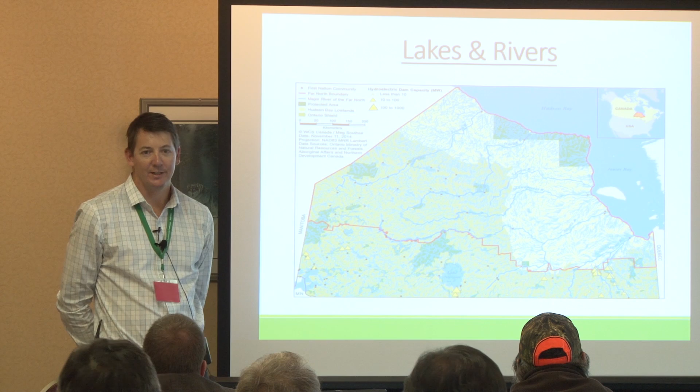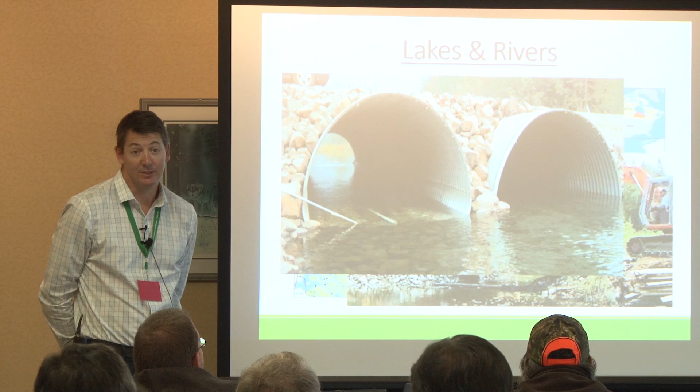In Northern Ontario, we do have the good fortune of having lots of water. So when stringing, whether it's a network of infrastructure or individual links to communities, there will be water crossings, and they can be done well when there's careful planning in place, respect for the environmental values, and the right mitigation measures or avoidance where possible.

There's a number of examples for crossing water, whether it's a steel modular bridge or culverts. But I think in any of them, when in the planning phase, priority should be on looking at avoiding them and identifying them early on, so that proper mitigation and environmental considerations are in place—because when poor planning takes hold, sometimes issues lie ahead.

Another thing that we have a lot of in Northern Ontario, where there's not water, there's generally swamp. And I'm sure, as you all know, roads can be built across or through swamps. Without careful foresight and planning, surprises do arise and can be problematic for all parties involved.

Generally, when crossing swamps, we want to limit the length of road interacting with that piece of terrain. There are different approaches. You can dig it all out through excavation, or try to displace the material by adding fill. Again, those are fairly invasive and expensive construction techniques. There's also opportunities to bridge or float that particular piece of terrain. We could look at using geotextile products, corduroy constructions used a lot in the past, and maybe that's an opportunity to be revisited for some of these northern routes.

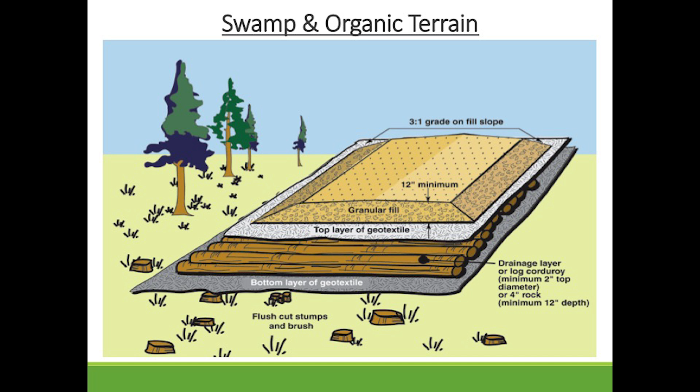Now, where there's not water or swamp, there's generally rock, which can be complicated and expensive to traverse. Rock can certainly be a benefit to any road infrastructure project because we can use it as a borrow or rock supply for the job. Bringing in aggregate to any length can be expensive and complicated if there's access limitations already. So avoidance, again, in route planning, looking at bedrock terrain, we want to steer maybe near it, but not necessarily across it. And of course, there's sensitivities associated with rock, land values, and human values that need to be incorporated into this planning study to identify these conditions early on.

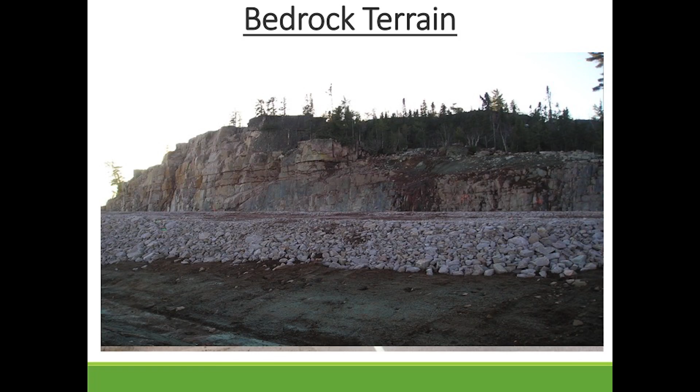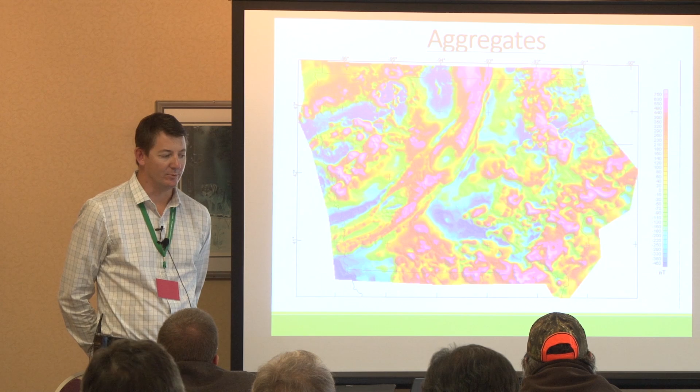Now, sort of a natural lead-in from looking at terrain and bedrock, it's important that we know the terrain. What I'm hearing from a lot of the communities, and from our experience, is find the geological maps, look at the topographical information available, and let that steer a lot of your routes where it makes sense. That'll get us up high and dry out of swampy or low-lying terrain areas, and provide access to very valuable aggregate resources.

Developing aggregates along these road networks will be a critical component to the success of it, and at least keep the costs manageable. Planned, environmentally conscious aggregate extraction makes a lot of sense. It can be done well, it can be done poorly, and we've seen many examples of that, of course.

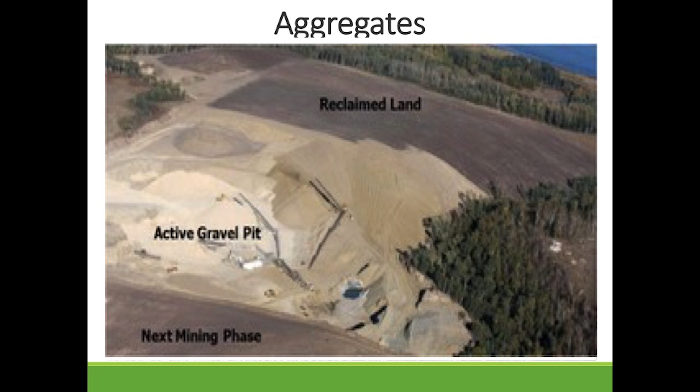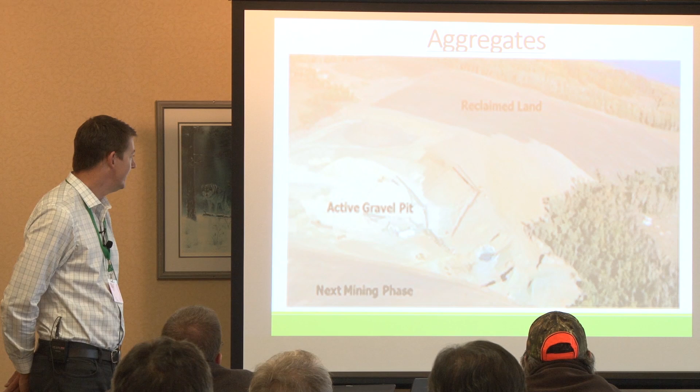This cartoon does show a nice little gravel pit, where it's got some reasonable buffers off of lakes or swampland, areas that have been reclaimed, which is nice to see, an active pit site, and some planning for the next phase of mining. So this sort of thing makes sense. And when planning routes, it's very important to take into consideration what you have for geology. We can't just let the engineering run everything.

So that sort of marks the where, if you will. We've identified the what, coming out of the justification component, the where, based on the route planning, and the how would line up more with the design element of this process. So you'd line up starting normally in a preliminary design stage, and the successful preliminary design would establish a well-defined scope for the detailed design component which would follow. It would have a good understanding of the environmental, human, and land values, and ultimately it'll recommend one alignment for future phases. Through this, there's a lot of consultation and input required from all the stakeholders to make sure we get it right.

As you get down the rabbit hole, it gets a little bit more boring into engineering, because now the magic's not really there. The opportunities are hopefully highlighted through route planning. We've identified what type of infrastructure we need. Now it's just a matter of getting it done. So a detailed design normally would bring it from how we're going to do it to getting it into a phase to get it completed.

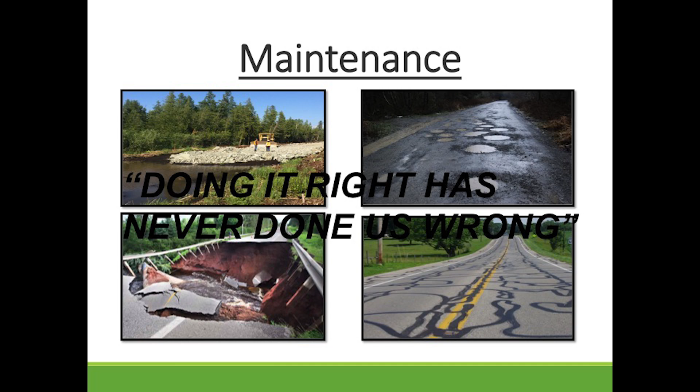It can be damaging and quite staggering if there's shortfalls in the construction or design resulting in washouts. Hopefully that doesn't happen. But if there's undersizing of culverts or storm events aren't calculated properly... somebody just went crazy with the crack sealant there. That's just an example of goofiness.

But again, there's a lot of complicated terrain in Northern Ontario. It's definitely expensive to build across, but it is certainly more expensive to fix after the fact.

So what I've done is I've put together a few sample projects that highlight how, going through justification, detailed design, construction, some projects that we've worked on recently across Northern Ontario. One happens to be in Nunavut, and it sort of highlights how these phases were brought in.

So a sample project not too far down the road that needed a new roadway was the portion of Highway 600 associated with the New Gold project. As you can see, this is just a cartoon, but there is a large hole in the ground, and that was the justification for the relocation of about 11.5 kilometers of provincial highway. We were involved working with the proponent, the owner, municipalities, and government agencies for the design and ultimately overseeing the construction of that.

So in that particular one, there were 8 alignments identified. They were all reviewed. The one ultimately selected, to be honest, was not the best alignment from an engineering perspective, but it comes back to a balance. You have to look at all facets and all the moving parts. It turned out the one that was selected was rated the best because it had the least property impact and had better environmental conditions than some of the other selections.

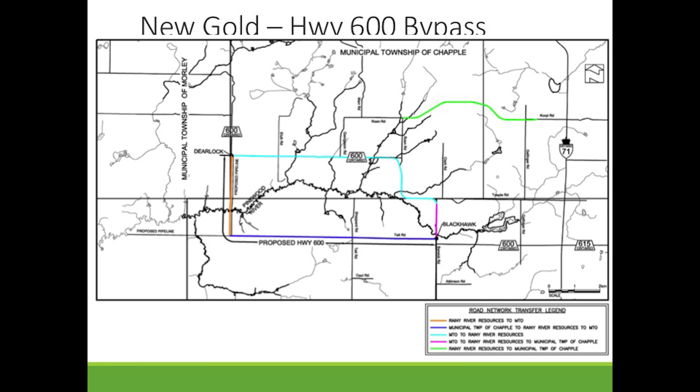Typical road, nothing exciting. It's a gravel surface road, 2 lanes, which would be very common, and we'll see a lot of that across Northern Ontario. Also, there was opportunity to provide power within the corridor, so it was used as a multi-function right-of-way or road allowance.

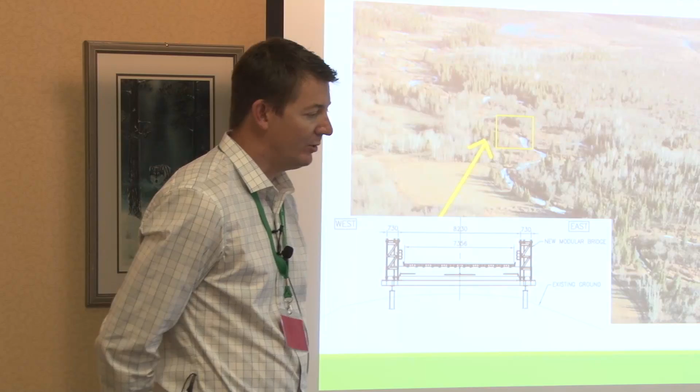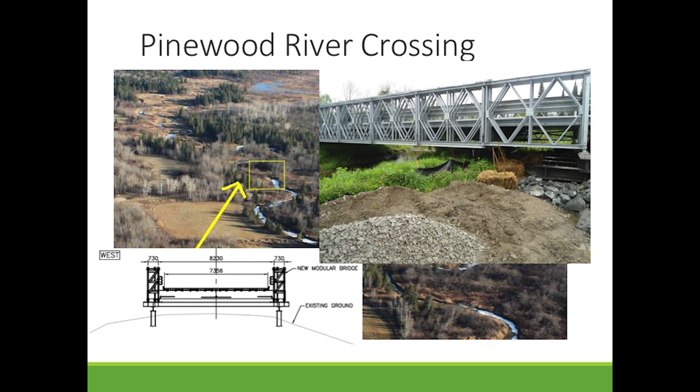And there was 1 water crossing on that particular one. Again, taking the basic principles of route planning, trying to limit the amount of water to be crossed, due to potential environmental impacts and the cost associated with that. This is the crossing of the Pinewood River, and we ended up putting in a 2-lane steel modular bridge, which was founded on piles because we had close to 20 to 30 meters of clay, so shallow foundations were not an option. You can see there's a couple of straw bales - there's erosion protection and environmental setbacks to mitigate what was a nice natural feature there.

But this project started in 2012, and construction opened in 2015, just for a rough idea on time frame. And that brought in all of the phases previously discussed.

Another project, again not too far from where Rainy River was, is the Mitaanjigaming First Nation access road - 24 kilometers of gravel road that had many unfavorable vertical and horizontal curves. The water crossings were fairly simple, largely just culverts. The justification was for improving safety for access, because too many of the curves were too sharp for school buses to make those corners, or there wasn't enough snow storage on the facility.

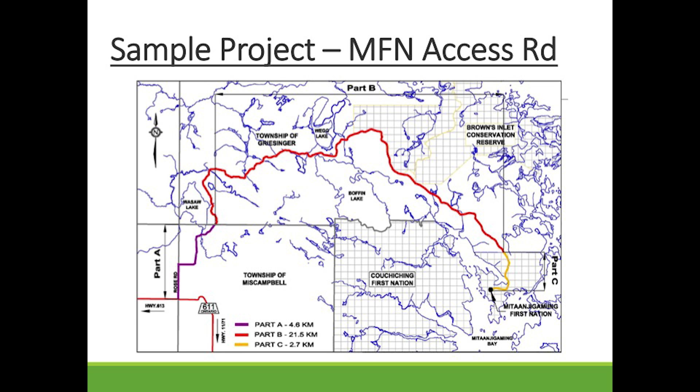For route planning, we got involved early on, and this was a very cool project because we had help from one of the community elders who knew the grounds, knew the values, and ultimately knew the best routes.

We were provided sketches and were able to spend a day or two walking about looking at these alignments. A lot of time went into planning, because when we're spending dollars that are hard to come by, we want to make sure every dollar counts and we get the right alignment for safety and for potential commercial growth opportunities, which I think was part of the driver here.

On this access road, it was fairly remote in terms of what was locally available for aggregate. So we worked with the community and did a feasibility study looking at 28 potential quarry sites or borrow areas. Ultimately it was narrowed down to one, which made sense geographically and considering the environmental values.

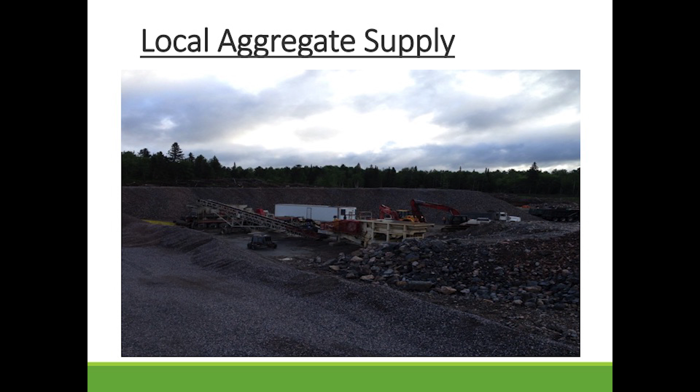This was a win for the community. They were able to go through the studies and the permitting process and establish a quarry site, which then fed aggregates to the project that followed. It also allowed opportunities for commercial partnerships elsewhere in the area, since they now had a high quality quarry source they could feed for future maintenance on this road, local roads boards, or what have you.

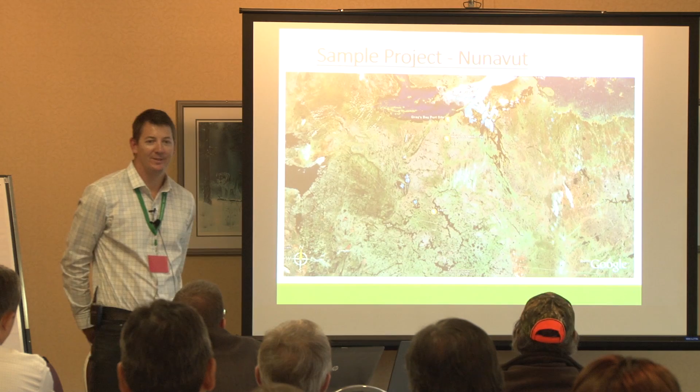The third project is a little bit further away. This is one I unfortunately never got my boots on the ground for. Rob Furnett spent some time in a helicopter reviewing alignments, and came up with what was, I believe, ultimately the selected alignment for the all-weather road, which was 54 kilometers running from High Lake Mine up to Grays Bay Port. The idea is to get ore out to the port at Coronation Gulf.

So again, this is just highlighting justifications. This would be an example of resource-driven infrastructure.

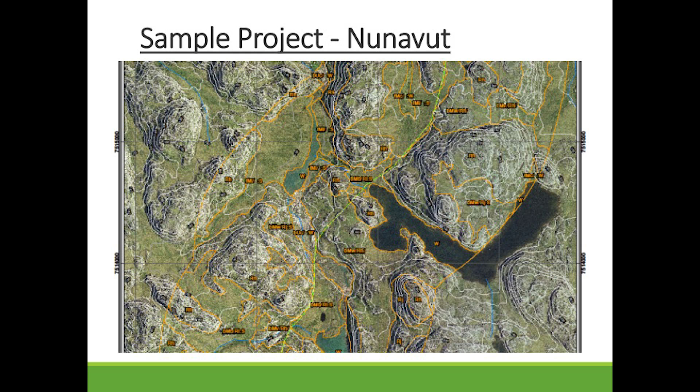For road planning, the first step was to jump on a helicopter and fly all the alignments, because the terrain is quite complicated. Similar to here, I guess, just with polar bears and no trees, so not all that similar. But at a high level, going from the 30,000 foot view down through reconnaissance, boots on the ground looking at water crossings and picking up topographical details, which then fed into the preliminary design for identification of alignments, and then revising those based on the environmental features and values identified through that planning stage.

Ultimately there were 6 bridges required and 8 culverts over the 54 kilometers of road. That's pretty good. Most of the crossings would have been steel modular bridges that could be easily transported to the site and launched without much in-place curing of concrete or similar work. So yeah, that was an interesting project. I wish I'd had more time to get up there.

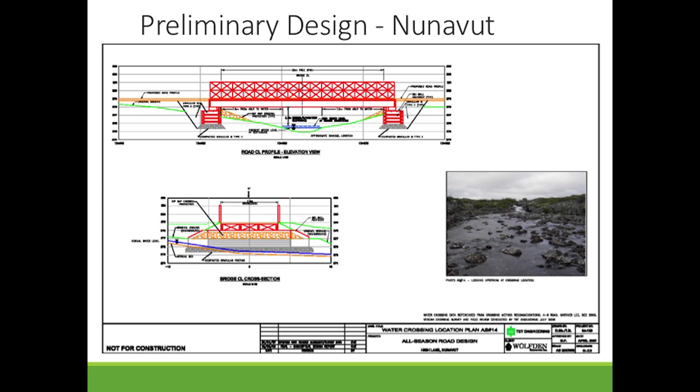But that's, in a nutshell, the moving parts to road building, or at least the approach to designing and implementing a detailed design contract for building any type of road in Northern Ontario. Maybe I could open the floor if there are any questions.

Question: regarding the construction of bridges and crossings in the north, what kind of crossing would you recommend for what we have up there, like the rivers and all that—would it be a gravel crossing or certain construction? I'm looking at the types and design of the bridges, and also the washouts on roads. What are your comments on road design in areas with muskeg and tundra?

So for water crossings, there are a number of options depending on the floodplain and the feature itself. Ideally, when approaching a river or stream, we want to hit it at its thinnest point, where the shoreline is most defined, avoiding longer reaches where floodplains extend, especially in spring or fall.